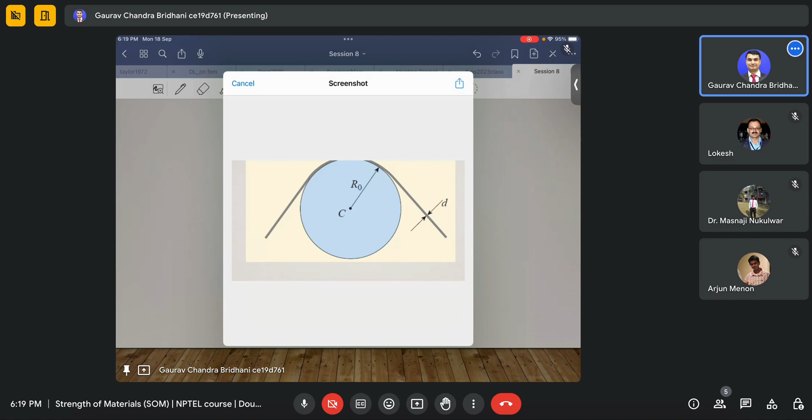We have to see how the bending is happening here and how we can relate it with the way we have studied in the lecture. If you see, this wire is going over this drum, and this drum is causing it to have a curvature. The surface of the drum, which is here at a distance r0 from the center, is kind of causing it to have a curvature. Obviously there will be some force in this wire, because you know what causes bending.

Pure bending is when there is no shear force, where the bending moment is constant over the length. In case of pure bending, you have seen in the lecture that shear stresses are absent - gamma xy, gamma xz are zero. And we have seen that sigma y, sigma z, or sigma yy, sigma zz are also absent. So only sigma x is there, that means there is an axial force. In a similar sense, if there will be an axial force in this wire, that will cause this part to bend.

So you have to think through yourself how it is bending. Obviously there is an axial force which will cause this wire to go around the surface of the drum, and hence this portion will be under bending.

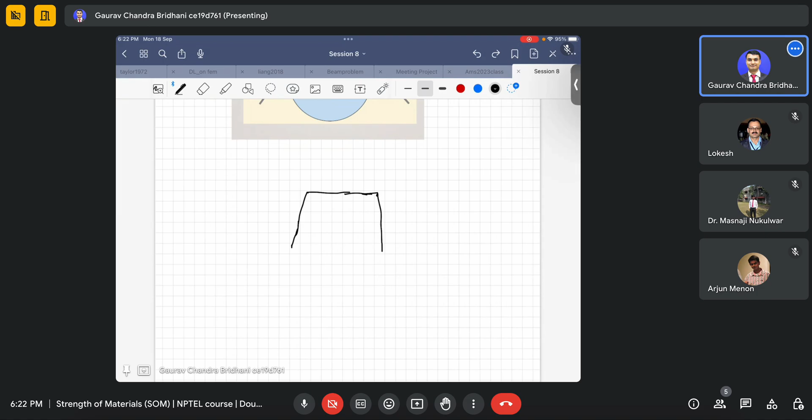As you know, the radius of curvature, as seen in the lecture, is till the neutral axis. Let me draw the reference case. You might remember the professor took some section like this in the lecture. This was the neutral axis, and he gave something like this. This was phi, and the radius of curvature was measured till the neutral axis, measured as rho till the neutral axis. The neutral axis is the axis with no stress - there is no stretch, no strain on this axis. This axis doesn't extend or compress, it remains the same length. So the definition of radius of curvature is till to the neutral axis.

So the same way we have to follow in our example also. That means here also, from this center, the radius of curvature will be till the center of this wire. And you know it's a wire, so it will be circular in cross section - also given in the problem, it's a circular cross section wire. So from this we can directly write the expression for the radius of curvature. This will be our radius of curvature: r naught plus d by 2, half of the diameter being the radius. So this will be the radius of curvature.

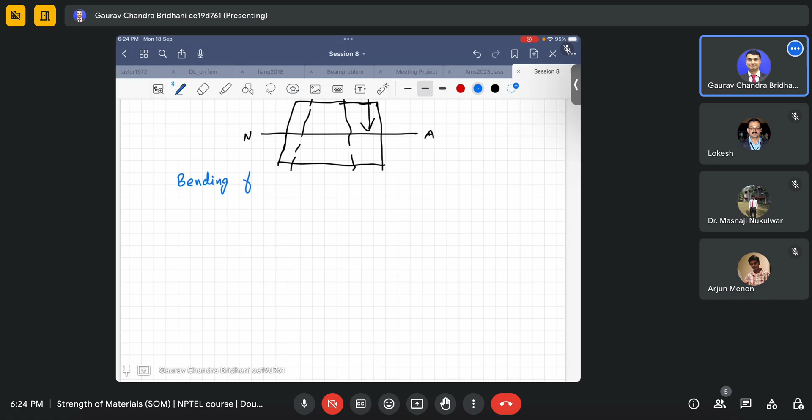So now we have utilized whatever has been given to us. Now let's proceed and see what we can do using the bending formula, or the Euler-Bernoulli beam theory, from which we derived the formula. So what we know is the bending formula: Mb by Iz is equals to minus sigma x upon y, is equals to E by rho. Okay, so this has been the formula.

And the minus sign is there because, as you understand, the positive sign is taken upward. So for a positive bending moment, there will be compression in the layer above and tension below the neutral axis. To ensure only that, the negative sign is used, because if you take positive y, it will remain negative, showing compressive stress. If you go down, y will be negative and the sign will vanish, becoming tensile stress. So this is the bending formula.

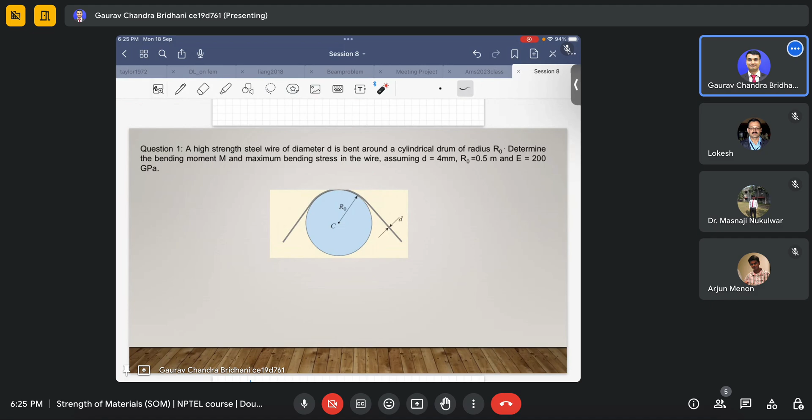Now we have been asked two things in the question, so let's check what we have been asked. We need to determine the bending moment M and the maximum bending stress. So what we need to find: bending moment, that is our Mb that we have to find, and second is maximum bending stress, that is sigma max.

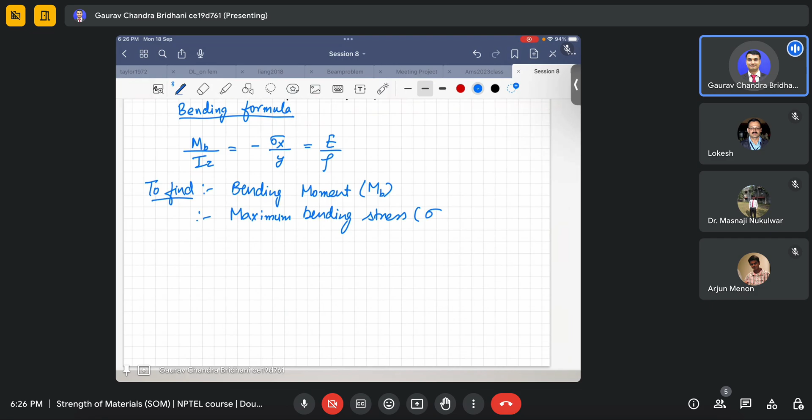So if you see, if you want to find the bending moment, what has been given in the formula - we know this part. What has not been given is Mb, which we want to find, and we need to know what is Iz. So we should find Mb, and we can find Iz, that's not an issue. So I will write these two first: Mb by Iz is equals to E by rho. Now first let's find Iz - the Iz of the portion which is bending. Here the wire is bending, so we have to find the Iz of the wire.

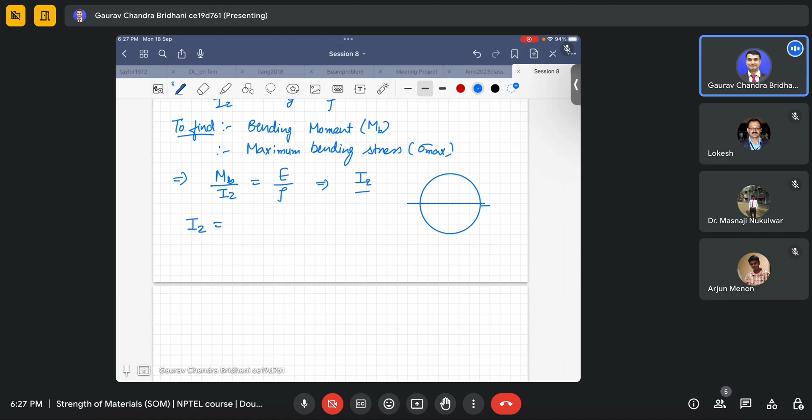Okay, so the wire has a circular cross section like this. We have to find the moment of inertia about this axis. So what will be the Iz about this axis? Iz will be pi by 64 times d to the power 4. Correct, that will be the Iz.

So now we know Iz in the above formula. Let's put it there and solve for it. So our M will be E times Iz by rho. E is given to us as 2 into 10 power 5 MPa, and Iz is given by pi by 64 into d to power 4. So what is d for us here? It is the diameter of the wire, that is given as 4, so 4 to the power 4, divided by rho. So we have just found rho, so rho is here.

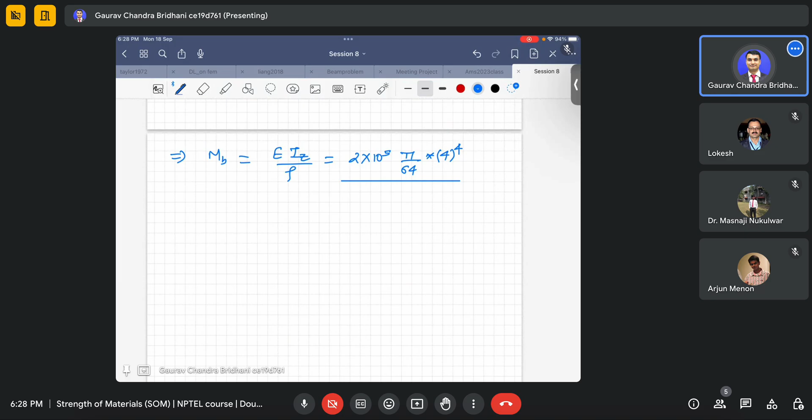r naught plus d by 2. So what I will do is put everything in mm. r naught is 0.5 meter, so 500 mm, and plus d by 2, so it will be 502 mm. I request any one of you to just find what value it gives to us.

Yeah, pi by 64 d to the power 4.

It is different. So suppose this is the z axis, and this is the y axis. So what we do is, that is the x axis, the polar axis. The axis in the longitudinal direction, that is the polar axis.

So you know that I x-axis is what? I y plus I z. And if you have I y, and you know I y and I z are the same, because it's a symmetrical shape, a circle. So if you add these two, it will become pi by 32 d to the power 4. That is the I x-axis, and I x-axis is called the polar moment of inertia.

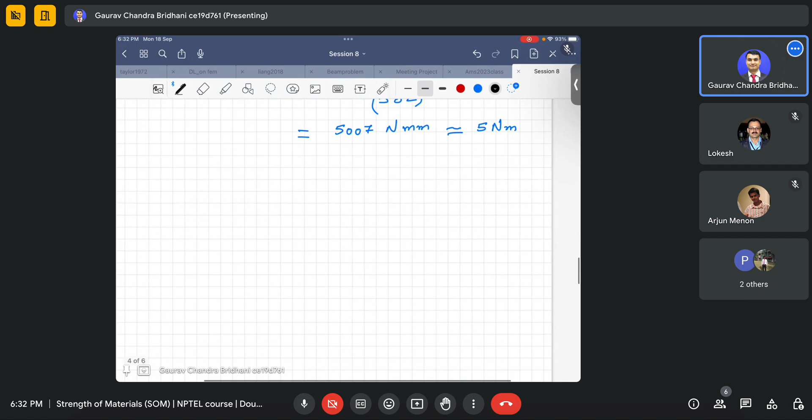Suppose it is something like this. I am trying to draw as correctly as possible. Consider that the thickness is not changing. Here it looks changed, but assume it is the same, it is same actually. So I am saying that suppose from this end to this end it is in curvature, in contact with the cylindrical drum, and this part only is being in pure bending.

So what I told is that there will be a neutral axis. Let's draw the neutral axis. Suppose this is the neutral axis. And as you know, here the material is isotropic, it is given. If nothing is being specified, we can easily assume that it is isotropic, and also E is given as 2 into 10 power 5 MPa, so we can go with that assumption.

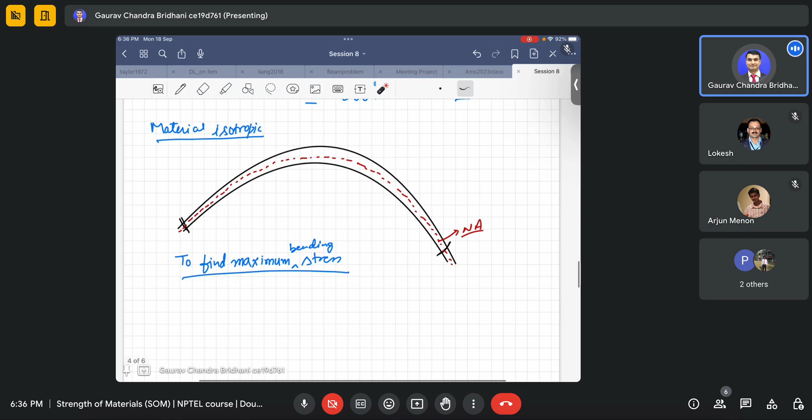So we need to find the maximum. Obviously the maximum will be at this surface only. We need to find the maximum stress. So our objective is to find maximum stress, maximum normal stress or bending stress — basically we call it maximum bending stress, because this stress is developed due to bending. We need to find it on either this or this surface. We are more interested in the maximum. So using the same bending formula, I'll get the maximum value, using these two terms to find the value of maximum stress. Let's find that.

We know that I'll drop the sign now. Why am I dropping the sign? Because now I am interested in the maximum, and maximum is the magnitude, not the sign — whether it is compressive or tensile. My objective right now is the value, so I'll drop the sign and say sigma max by y, which will be equal to E by rho.

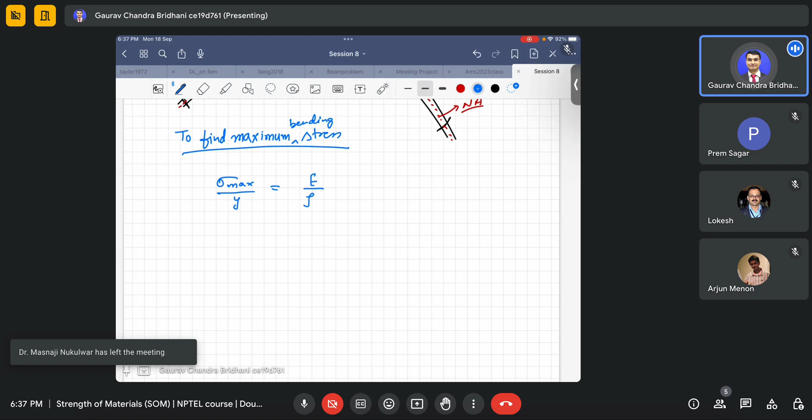So let's find sigma max, and I told you where the maximum will occur. Maximum bending stress will occur at the surface of the wire. You can choose either the tensile surface or the compressive surface. So sigma max will be: E is 2 into 10 to the power 5, and y will become d by 2. So it will be d by 2, d is 4, so it's 2 divided by rho. So rho is 500 plus 2. So sigma max will be 2 into 10 to the power 5 into 2 divided by 502.

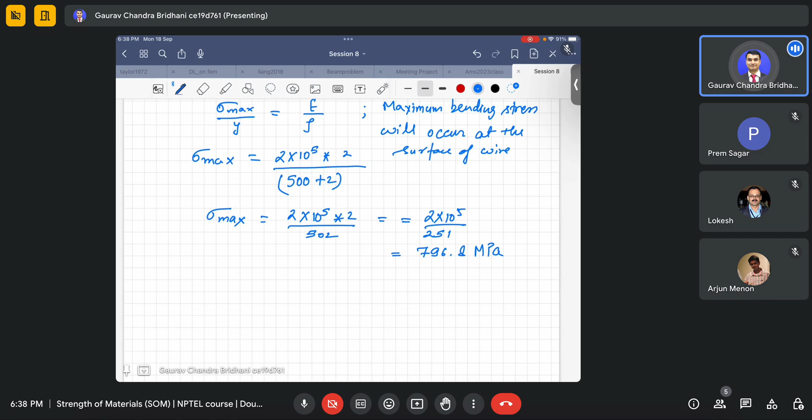So if you solve this, what will you get? It will be 2 into 10 to the power 5 by 251, I think. Can you divide this and find the final answer? It will be 796.8 MPa, so I'll say 797 MPa. So that will be the maximum stress, 797 or 796.8.

And it will occur on the surface of the wire, and this is due to bending. So this is the stress generated due to bending. That's how we can study a problem like this. So this is very common — like if you ask me what is the situation where these kinds of things happen.

Why is this distance, y? I'll explain. It is the distance from the neutral axis to the surface where we are finding the stress, basically bending stress. It depends on us. Our objective was to find the maximum value, so we took y equals d by 2 because we want to find it at the surface.

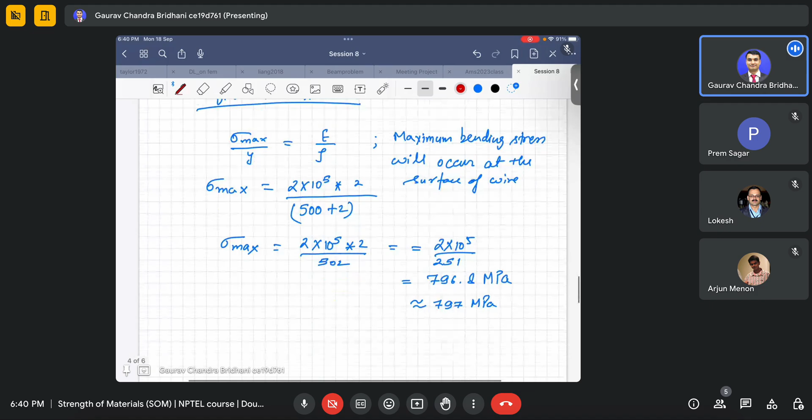Yeah, come again. Yes, Arjun. Yeah. Yes, it will pass through. It is the longitudinal axis also. Yeah.

Okay, what I'll do is draw the wire longitudinally as well as in cross section.

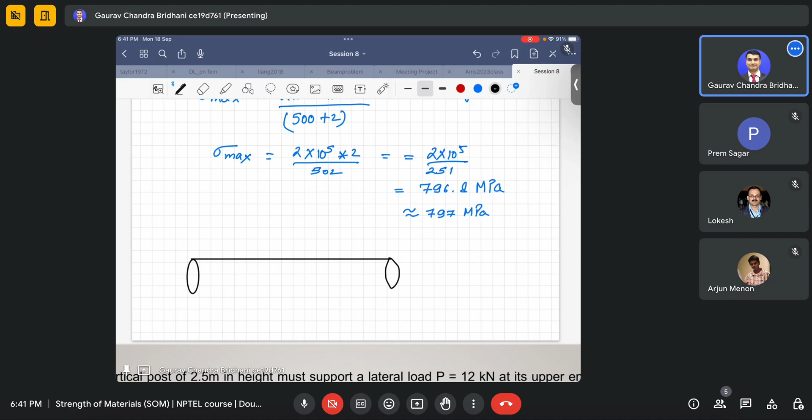Suppose this is your wire and this is your longitudinal axis, and I'm drawing here the cross section. Okay, so it also passes through here. So basically this is your neutral axis, which will pass through the center of the circle.

And what we are doing, we are trying to find this is our y, because we are trying to find at this point, at this top point here, the stress, because the stress will be 0 along this axis, there will be no stress.

Yeah, Lokesh. If you take downward, it will be negative, and accordingly the thing will change, and the magnitude will be same. Only one time it will be tensile, one time it will be compressive. That's all, we can take it negative.

So this is our y, this distance from the centroid to this point, red point marked, this is the y, because as we discussed, either the stress will be maximum here or there only. So anyway, any point we can choose, because our objective is now to see what is the maximum value.

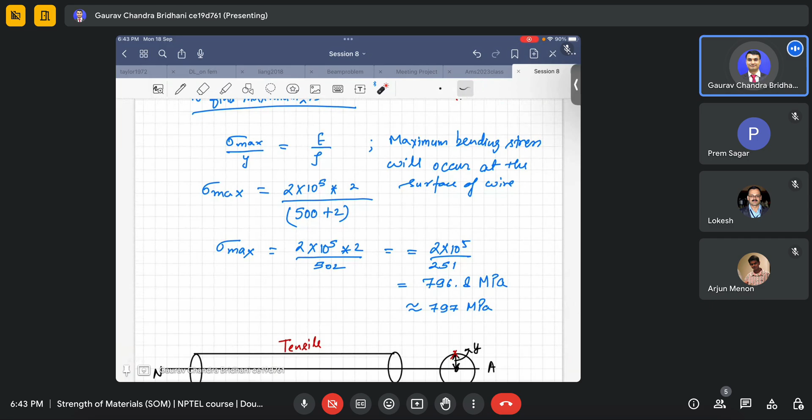Okay, so this is how we'll find what is the sigma max, and we already know that at one surface sigma max will be tensile and at another surface it will be compressive, and you can see that the values are very high. If you compare with what we studied in mild steel, it was around 250 MPa was the yield, but here it is very high.

So actually it's because it's a high strength steel wire. Basically high strength steel wires have a very high yield stress, so their yield value will range between 1100 or 1200 to around 1500 or even 1600. And these are not single wire, there are strands of wire. So basically those wires which are used in pre-tensioning and post-tensioning, those are one of the examples of the high strength steel wires which I can quote.

So what I was saying, where we can find the applications, like what kind of situation we will see in real structures. The best I could say, like above the pulley. So this could be the pulley and the wire going above it.

Because what we know, the steel wire which we use over the pulley is also subjected to uniaxial loading. It will be uniaxial till here, but as soon as it enters this, it is kind of bending because of this pulley. One way this, but we have to put a proper idealization there about the shear, whether there is friction between the pulley and the wire or not, because if friction is there, that will cause some shear. So that is one example.

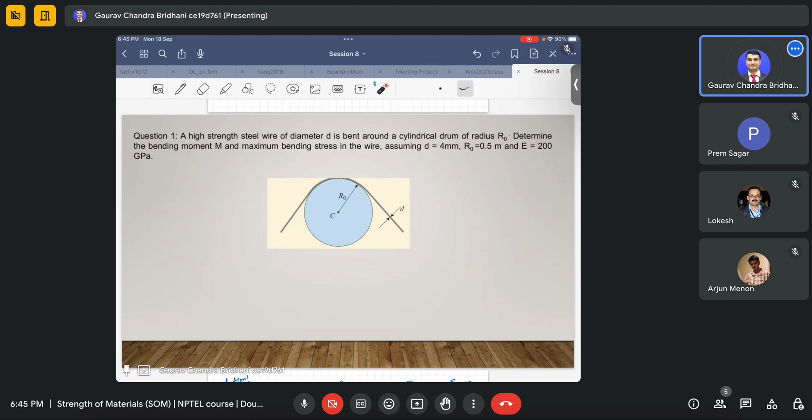Then on these bridges we use wires. Bridges also can have these kind of structures which will pass over the wire from one side to the other side. So there, the best example we can see is of pulley.

So in this problem we came to know how we can analyze or find the moment, bending moment, as well as the value of maximum stresses if we know the dimensions already.

As in this problem we knew the dimensions, so we were able to find the other values. Okay, I hope you understood this part. So we'll move to the next problem.

Okay, yeah, yeah, yeah, yeah, yeah, yeah.

Yeah, for a linear constitutive relation, if your material model is what we are using here, Hooke's law, then for Hooke's law it will be like that. But if the constitutive relation changes, if you bring in some different material, some orthotropic or anisotropic material, then the variation of the stress may not be linear.

Although the strain variation will remain linear. As you may remember, the professor told you that the variation of the strain, epsilon x, was minus y by rho, or minus y into d phi by ds. So that variation they got irrespective of the material. There is no involvement of material there.

So what we learn from that, the variation of the strain will always be linear in homogeneous beams, or homogeneous isotropic beams. But when you have a constitutive relation which may be non-linear, meaning the stress and strain are not related in a linear fashion, then the variation of the stress could not be linear. It could be non-linear also, it could vary as y square or something like that.

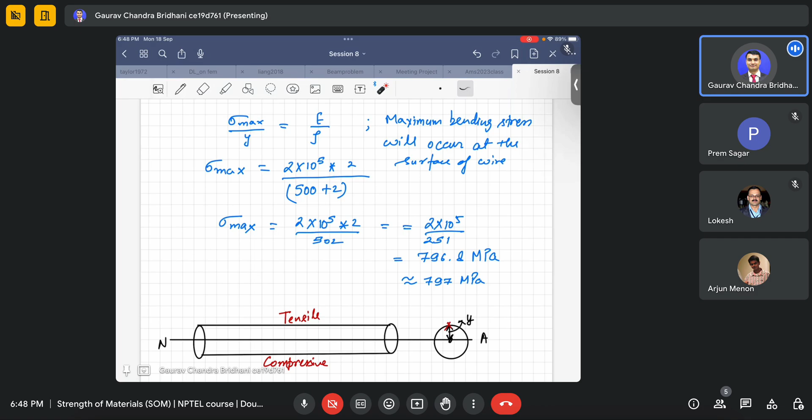So what happens if you have shear stress also involved? Let's take up an example of that. Then we'll move to the next problem.

So let's say we have some situation like this. We have a beam, something like this. We have a roller here, a hinge here, a roller here, and a point load P, and this length has L. So what I'll do is draw the bending moment diagram and shear force diagram of this beam.

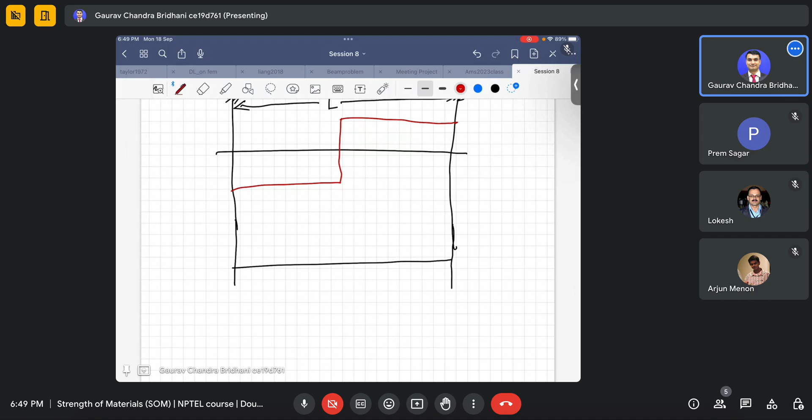So let's do that. First I draw the shear force diagram. It will be something like this, vertical here, and then it will be like this. And if I draw the bending moment diagram, it will be something like this. This will be PL by 2, and it will be minus PL, minus P by 2 here, P by 2 there. So this will be our shear force diagram, this will be our BMD.

Now you see that there is a variation. The bending moment is varying along the length. From this portion to this portion it is varying, it is not constant. You can see there is a positive shear here, a negative shear here.

If you remember the lecture, dm by dx comes as minus v. This was done in the last lecture. That means whenever there will be a variation of m, the bending moment, there will always be a shear force associated. That means as soon as you come up with a case where there is a variation of bending moment, invariably you will come up with a shear force also.

Now the bending theory, the formula we have just used, is developed only for pure bending, and it will give an exact answer only when the body is isotropic and it is subjected to pure bending and it is a slender beam. Those are the very basic foundational assumption requirements: the beam should be slender, meaning the depth of the beam should be far less than the length of the beam; second, it should be isotropic material; and third, it should be subjected only to pure bending.

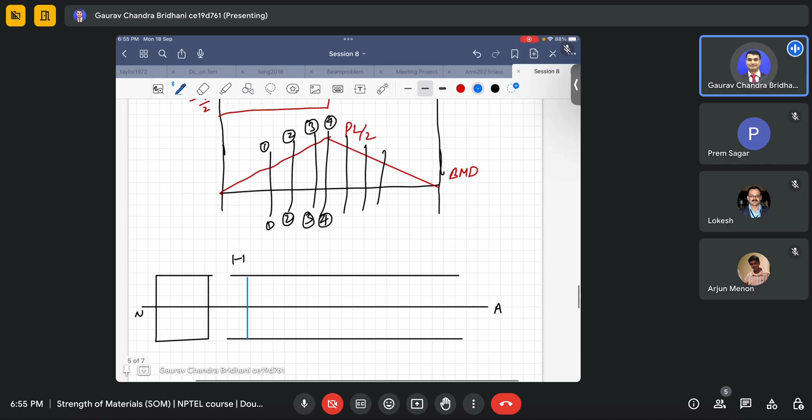Now I will draw the variation. First is 1-1. So for 1-1, as you know, what will be the bending moment? The bending moment of 1-1 will be less compared to 4-4. So we know the equation: M/Iz equals minus sigma x by y, that we know.

I am drawing the variation along the depth. So what I will do is write sigma x equals minus M into y by Iz. Now M I will write for this section specifically, so I will write the formula also. So for the first section it will be sigma x equals minus m1.

I will write m1, so it becomes m1 into y by iz. Now m1 is constant, iz is constant, only y varies. So y will vary from 0 to some positive value. I'll mark this as plus h here and minus h here, and it is subjected to positive bending.

It is subjected to positive bending, meaning the bottom portion will experience tension and the top portion will experience compression. So I will draw the variation - it will look somewhat like this, with this in compression and this in tension.

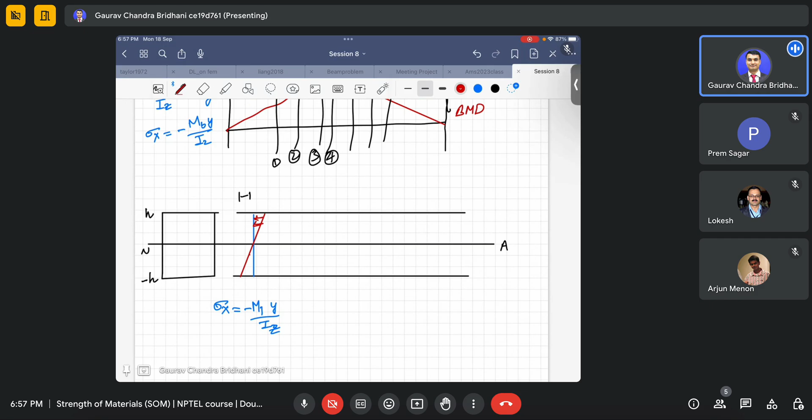Now I'll go to section 2. What will be the variation for section 2? Again a straight line. Now for section 2 I will write the equation again: sigma x equals minus m2 y by iz. The only thing that has changed is m2, rest is the same.

You know that m2 is greater than m1, and it is not changing within section 2 - this will be the value of m2, the bending moment at section 2, and that is greater than m1. That means sigma at x2 will be greater than sigma at x1, for the whole variation, although it will be 0 at the neutral axis, rest it will be more.

So how do I have to draw it? I have to draw a bigger variation, taking a bigger point, something like this - it will be more. You can see sigma x2 is more than sigma x1 at the corresponding levels of y.

Now let's go for section 3-3. I'll draw a vertical line for section 3, and what will be the formula? Sigma x3 equals minus m3 y by iz. Again, what has changed is m3, rest all are the same. That means sigma x3 will be more than sigma x2.

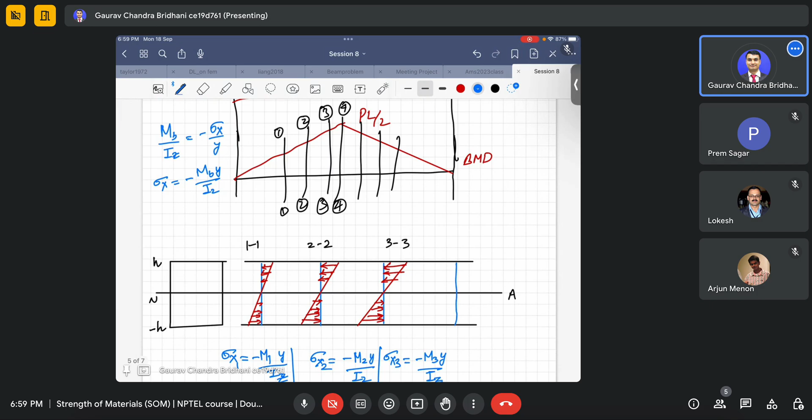Let's go for the final section, where we have the maximum bending moment. As you can see from the figure, section 4-4 has the maximum bending moment. So we will draw for that point, section 4-4. What will be the value here? Sigma x4 equals minus m4 y by Iz, and we know that m4 is the maximum of all.

So nothing is more than the moment at that point, so I'll draw the maximum one - something like this will be the maximum, with compression here and tension here.

So that's how, from section to section, you can visualize how the bending stresses change. Now if somebody asks where the maximum bending stress will occur, from this figure we can always say that we have to first check if the bending moment is constant. If the bending moment is constant, all these top values will be the same - they won't vary. That is the whole point.

But if the bending moment itself is varying, like we can see here, the section where we find the maximum value of the bending moment - that point will be the place where the maximum bending stress occurs, and that too on the top fiber. Either you work with the top fiber or the bottom fiber, but that only - either this place or this place on the section with maximum bending moment, that is the point. But the variation of stress will not be nonlinear in this case either, because we have said the material is isotropic and we are using Hooke's law.

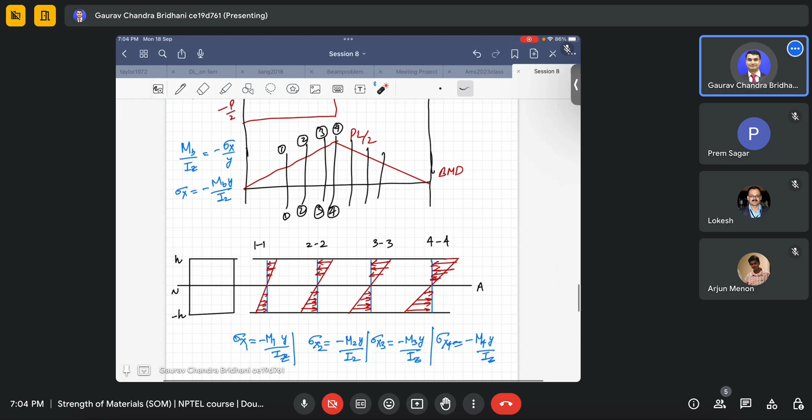I'm pretty sure the professor will explain this with an example, I think for deflection, because that is the most important part there. So from there he will explain how we are still using the bending theory, although there is a shear force.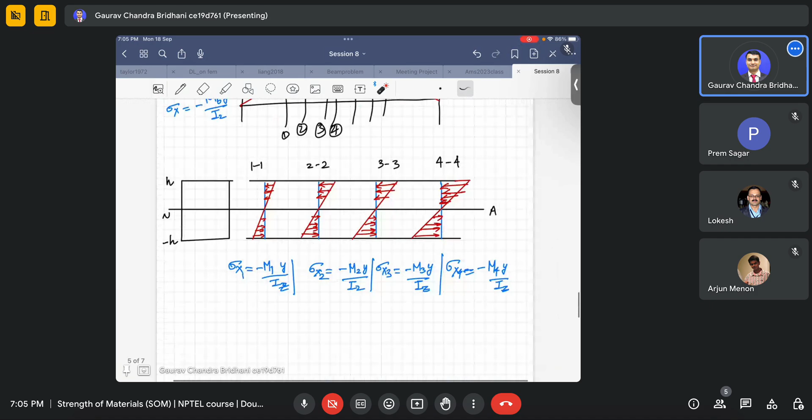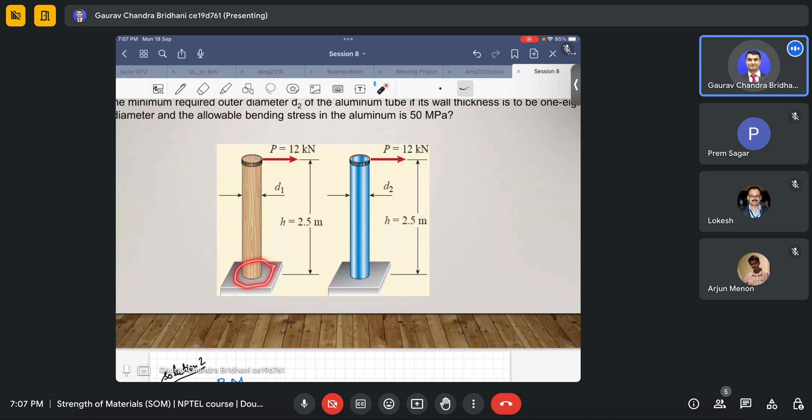So, our load is such that it acts as a cantilever. This is the fixed end, this is the free end, and there is a load acting at the free end. If I draw the bending moment diagram, it will be linearly varying, something like this. It will be 0 here, and it will have a maximum value at the base. This will be P into that H distance, where P is the load and H is the distance.

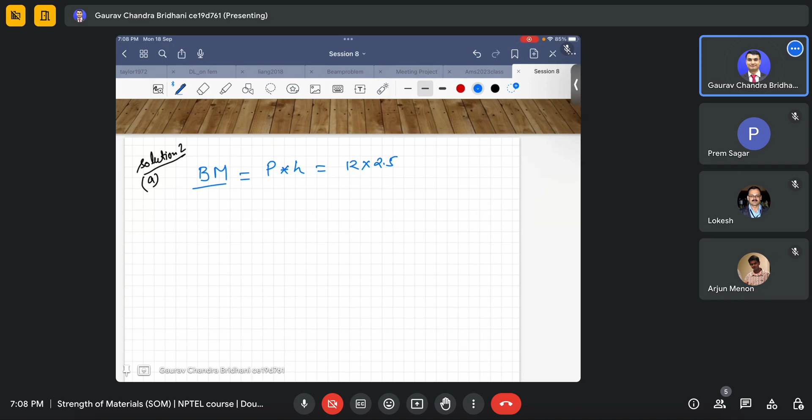So I will directly write what is the bending moment. P is given as 12, so P into H will be the bending moment. P is 12 and H is 2.5, so it will be in kilonewton meter. I think this will come to 30 kilonewton meter.

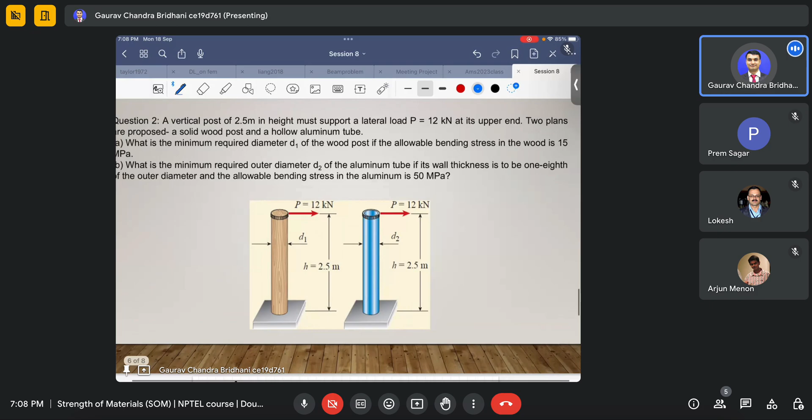So we got the bending moment for the wooden case. We are solving the first wooden case. Now let's write down what is the allowable bending stress. Sigma allowable for the wooden case is 15 MPa. That is the allowable stress.

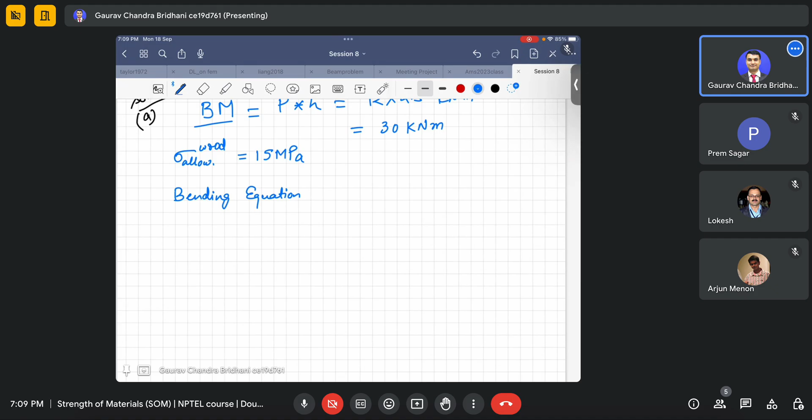Now let's go to the bending formula, our bending equation. What we know is M by IZ is equals to minus sigma x upon y, is equals to E by rho. That will be our equation.

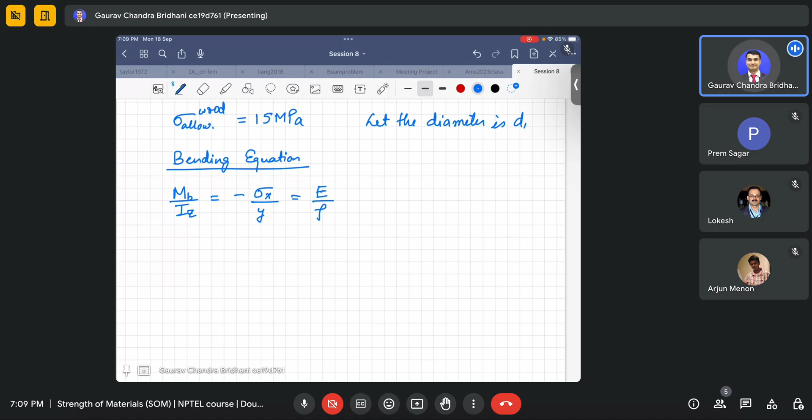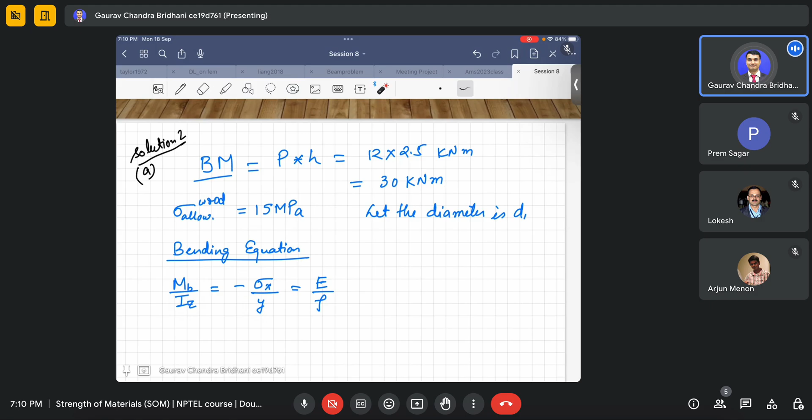Now we want to find the diameter, given as d1 in this case. Let the diameter be d1, which is already given. Now we know what is the bending moment, and we know the allowable bending stress value. What we don't know is what diameter we should design for, so that it will have this allowable value and also be able to resist this given moment. So basically we have to design the diameter.

So what I will do is draw the cross section of the post. This will be the ZZ axis, and this will be the center. As we have discussed, the maximum will occur at this topmost point.

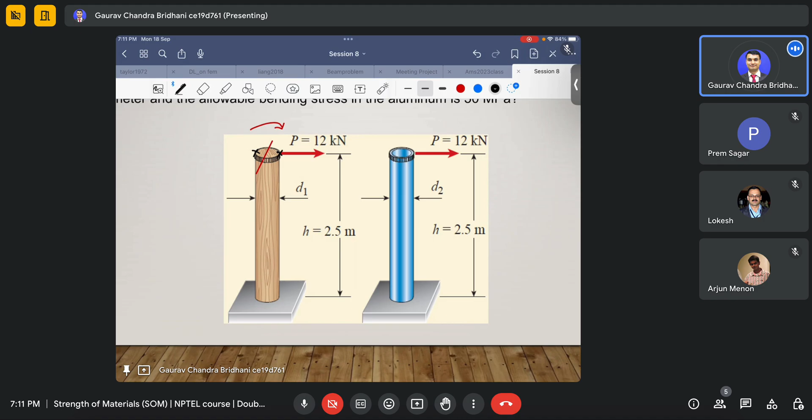If it is bending, as marked in the figure, some bending moment will be acting like this. So if we see, the axis of bending, it will bend around this axis. Either the maximum will be here or here, but one place it will be tension, another place compression. As per that case, I have rotated the cross section here, don't get confused - either it will be there or here. I've just rotated that cross section for ease of looking, and the moment is acting like that only. There also I have shown how the moment is acting - you can see the moment is acting.

This is our ZZ axis. Suppose the moment is acting like this, so I will represent the same moment here - it will be like this. This is the moment acting.

For this case, we know how to find IZ. IZ is Pi by 64, and d1 is the diameter, so d1 to the power 4. And what will be y? Y will be d1 by 2, it will be half - that is the radius where we are going to find the maximum value. So what I will do is insert these values here.

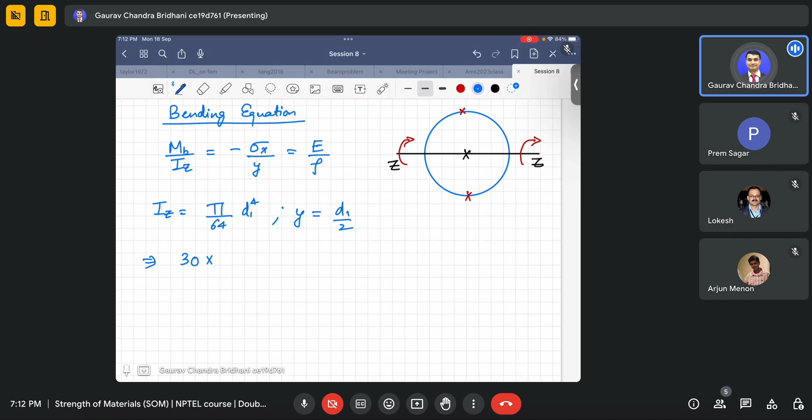So our moment is 30 kilonewton meter. I'll convert everything into meter, Newton and mm, so it will be 10 to the power 6 - it will get converted into Newton mm.

So the bending moment in kilonewton meter divided by IZ, that is pi by 64 into d1 to the power 4, will be equal to... I will drop the sign because I am going for the maximum value, so no need of sign here. It will be 15, the maximum allowable value given to us, in MPa. So MPa is also Newton per square mm, divided by d1 by 2. So from here we can get it directly that 30 into 10 to the power 6 divided by 15 is pi by 32 d1 cube.

So d1 cube equals, or I will write d1 equals 2 into 10 to the power 6 into 32 by pi, cube root. So if someone can help me find this value, 2 into 10 power 6 into 32 by pi, cube root of that. So what will it give?

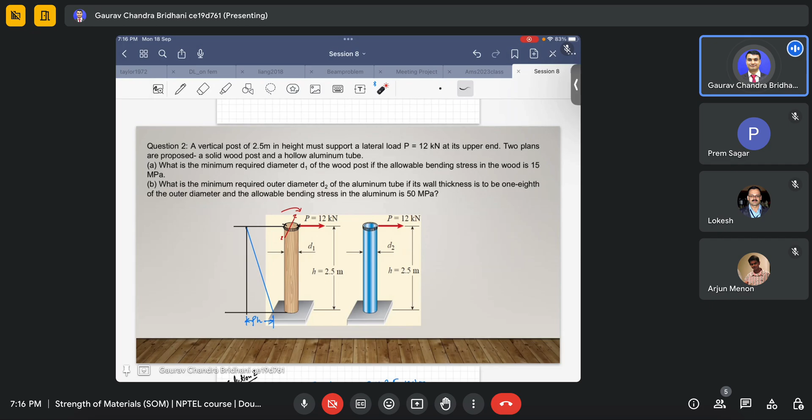Then we'll go for the next part. Now the next part is more interesting, in that case first of all it is an aluminum post instead of wooden. We have changed to aluminum. So what is the minimum required outer diameter? We need to find this D2 of the aluminum tube if its wall thickness is to be 1/8 of the outer diameter, so thickness T of the wall is 1/8 of D2. And the allowable bending stress in aluminum is 50 MPa. So let's do that.

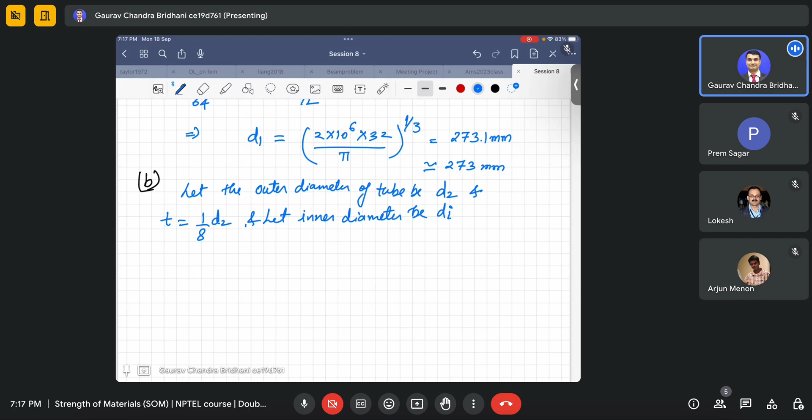So we'll say let the outer diameter, diameter of tube, be D2. We know thickness is 1/8 of D2, that is given. Let inner diameter be Di, meaning D inner diameter. So I will draw the cross section, something like this and something like this. So this is the neutral axis.

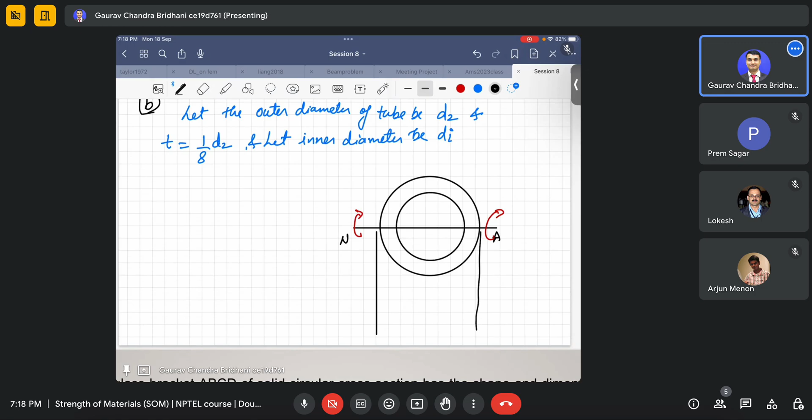About this the bending is acting, same bending moment is acting, no change in bending moment. Only the material and the dimensions are changed. And you know which diameter this is. So this one is the outer diameter d2, and this one is the inner diameter di.

Now we know the thickness is 1 by 8th of d2. So if I find di, what will be di? Di will be d2 minus 2 times thickness, correct? So what is d2? D2 is d2, and this is 2 into d2 by 8. That means di is d2 minus d2 by 4. That means di is nothing but 3 by 4 of d2. That means we got di in terms of d2.

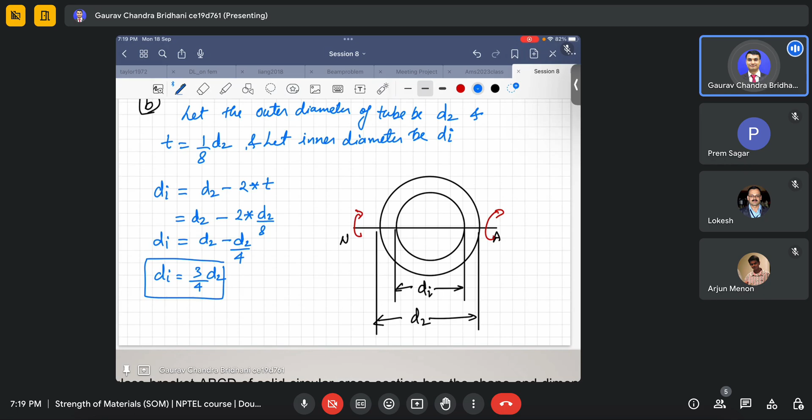Now from this, what we know, again we will go for the bending formula. I didn't calculate the bending moment again here because bending moment is same, it is not going to change. So the formula is Mb by Iz equals minus sigma x by y equals E by rho. Again we have been given a bending moment of 30 kilonewton meter.

Iz we don't know because the diameter is unknown. Sigma we know, the allowable value is 50 MPa, and y we will find. So sigma allowable for aluminium is 50 MPa, that is the allowable bending stress.

Now as you can see from this figure, this will be the center. I will draw the radius. You know there is no material inside, nothing is there, so there will be no stress there. Stress will start varying from here and vary till there, and because this point is farthest, this will have the maximum. Don't confuse yourself, the y is increasing in this direction, so this will be the maximum.

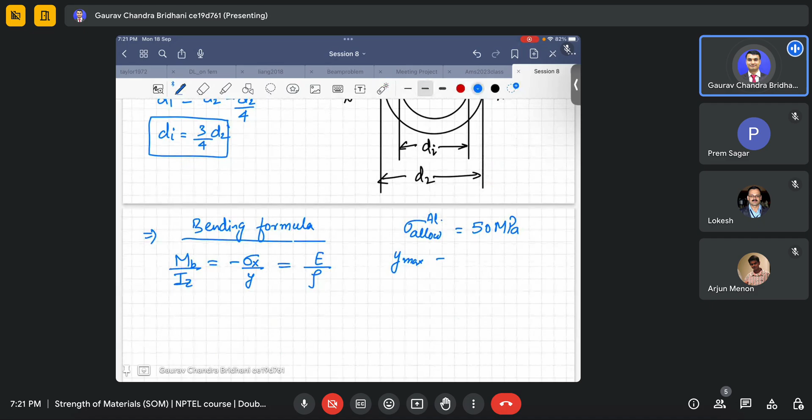And how to calculate Iz? It will be calculated the same way we calculated the polar moment of inertia for a hollow section, just using 64 instead of 32. So it will be pi by 64 times d2 to the power 4 minus d inner to the power 4.

Now we know what d inner is in terms of d2, d inner is 3 by 4 of d2. So it will be pi by 64 times d to the power 4 minus 3 by 4 d to the power 4. I'll take d to the power 4 outside as common, giving pi by 64 times d to the power 4 times one minus 3 by 4 to the power 4.

So can someone tell me this value, this factor one minus 3 by 4 to the power 4? It comes out to 0.6836, times pi by 64 times d to the power 4. So this is our Iz that we have to use.

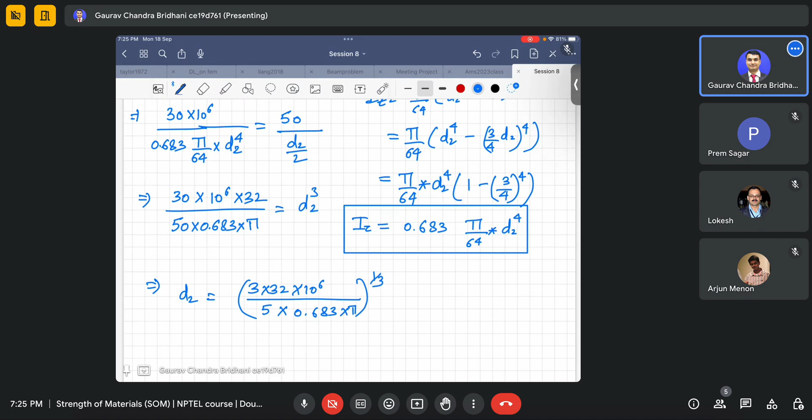So if someone is able to find this, please let me know what is the value of d2. Okay, 207 point something. So d2 is coming out to 207.6 mm, so we can safely say 208 mm.

So we found d2, the outer diameter, and we can find inner di, which is 3 by 4 of d2. Just multiply this with 0.75 and tell me the answer. 208 multiplied by 0.75 gives 156 mm, so that will be di, the inner diameter.

So we were able to find that the inner diameter is 156 and outer diameter is 208 for the aluminum case, where we have an allowable stress of 50 MPa, subjected to the same bending moment of 30 kilonewton meter, with the length of the beam also the same.

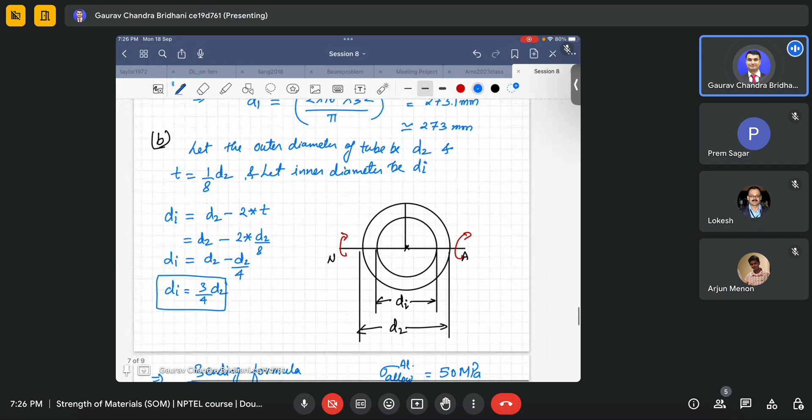That is how we choose what material to use to make a beam, because we have to see by which material, utilizing minimum material, we can get the maximum output. We have to optimize the weight also.

Right now we are not talking about weight, but when we come to a real design situation, suppose we have to design a shaft which is subjected to bending, or suppose we have to design some beam which is subjected to bending somewhere, in that scenario weight also plays a very important role. As we go for a heavier material, or a material having higher density, or longer beams, the self weight of the beam will also increase.

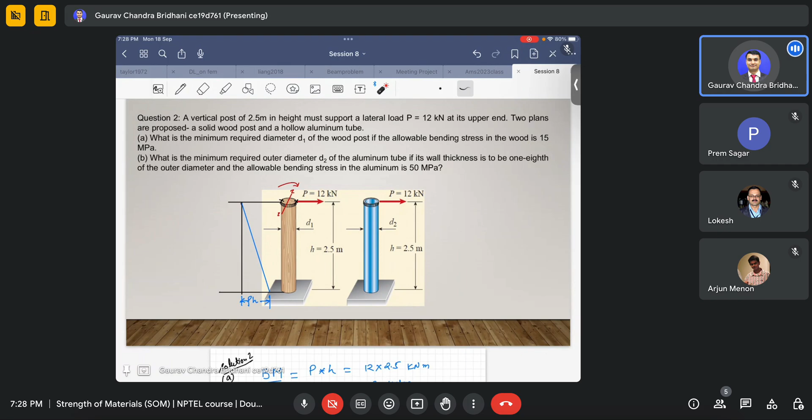So for that we have to think of the best material, so that we can get maximum strength with minimum weight. That's how steel plays a very important role, because it has a very high value of strength to weight ratio. It has very good strength compared to its weight.

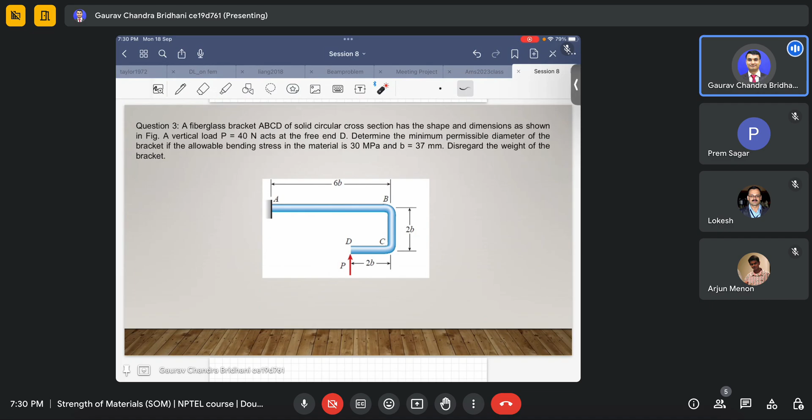Now determine the minimum permissible diameter of the bracket, if the allowable bending stress in the material is 30 MPa, and b is given as 37 mm. Disregard the weight of the bracket — we are not concerned with the weight or the moment generated from the weight of the bracket. We are only worrying about this load of 40 Newton, and how much diameter we should make so that the allowable bending stress in the material does not exceed 30 MPa.

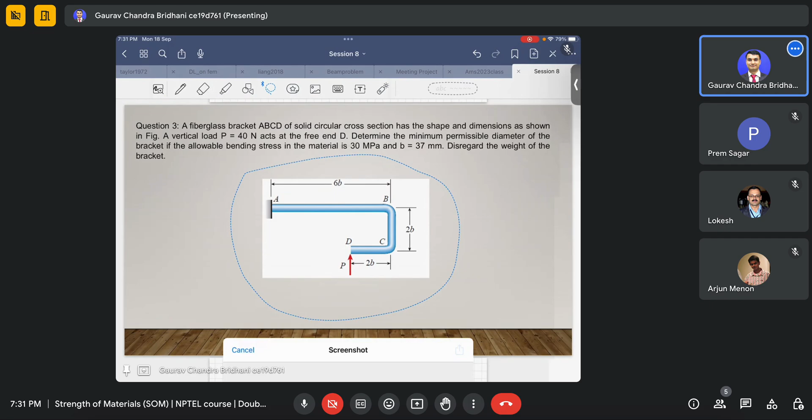So what I'll do is copy this figure, and then we can see how we have to solve this one. Okay, so this is for us.

Okay, so first of all, in this problem, where you can't really find what is happening or where the bending moment is coming from, in this kind of figure we have to draw the free body diagram. We have to use some concepts of mechanics and come up with a free body diagram. Then only we can understand what is happening.

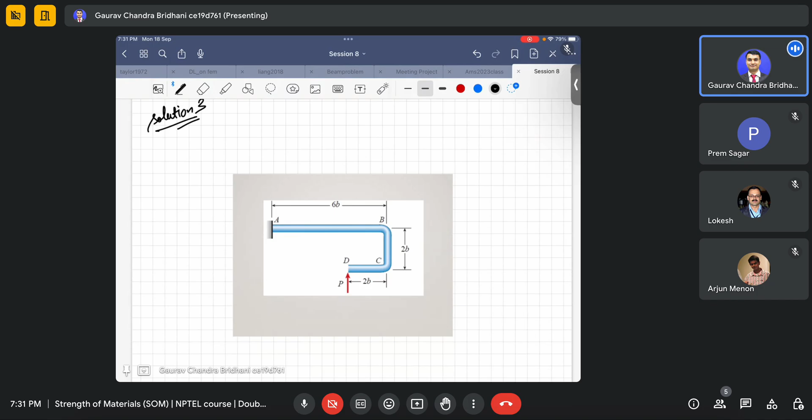So what I will do is draw the free body diagram for each of these parts: AB, BC, and CD. I have the luxury to start from anywhere, it's not fixed that I have to start from A or B. But the most important part is that the body should remain in equilibrium, it should not go out of equilibrium.

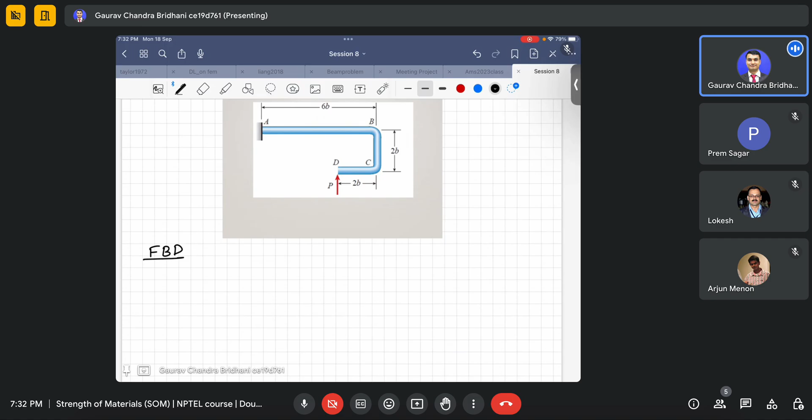So what I will do is start with DC, because the force is already given there, the load is given there. So I will draw first for DC. FBD, free body diagram, we will draw for DC. I will draw the DC part here.

Don't get confused that it is a rectangular cross section, it is circular only. I am just not drawing it in that sense, or I can draw like this, but remember that it's circular, not rectangular. This is end D, this is end C, and I am drawing it.

You know this, I have explained this. When we draw a free body diagram, we draw a very small distance away from the joint, from that place where it is joined, to reveal the reaction forces. So this P is given here.

So first of all, if I have to translate this force, how will I do that? What I will do is draw one force here, P, like this. So what I have drawn is a similar force here P acting in the same vertical line, and another force P acting in the vertically downward direction. Now because I have added this, nothing has changed, since the same force acting upward and the same force acting downward has been added. But what happens is you can see there is a force showing like this, which is having a couple.

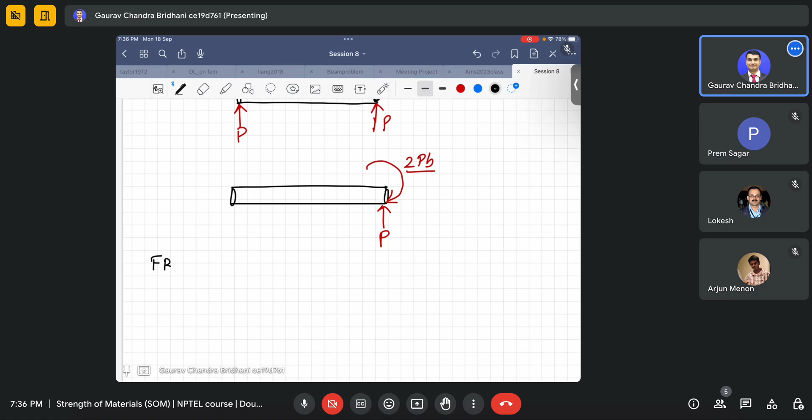Now, at this joint, the bending moment as well as the forces will just be translated to this vertical CB. So what I will do is draw the FBD for CB. Let's draw first the CB part. So it will be something like this.

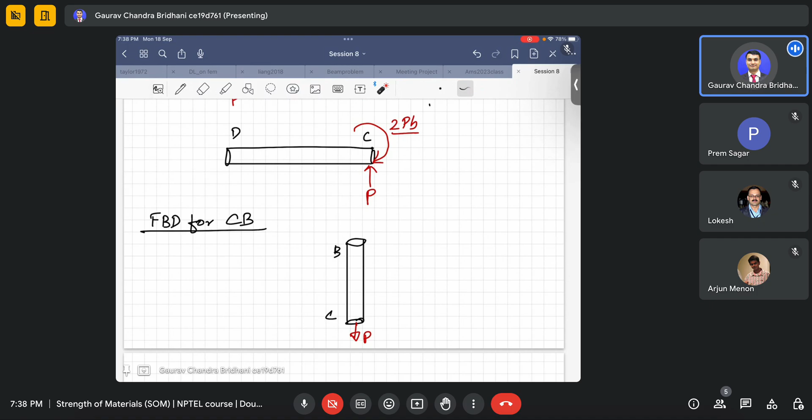Now similarly we have a moment. What is the moment? 2 into Pb, acting clockwise. So to have moment equilibrium at joint C, to counter this clockwise moment, there will be an anti-clockwise moment with the same magnitude, 2Pb, at C, in the opposite sense.

So now you know what is happening in CB at end C. To satisfy this, again we have to apply the equilibrium equations. We have three equilibrium equations. What I am doing all the way is applying equilibrium equations only, so again we apply them in this part.

When there is an axial force here, to counter this there should be an axial force here also, to counter that and to counter the moment which is there. So now I have satisfied equilibrium in this direction - force equilibrium along this is satisfied. There is no force in the horizontal direction, so nothing has to be done. Now coming to the moment.

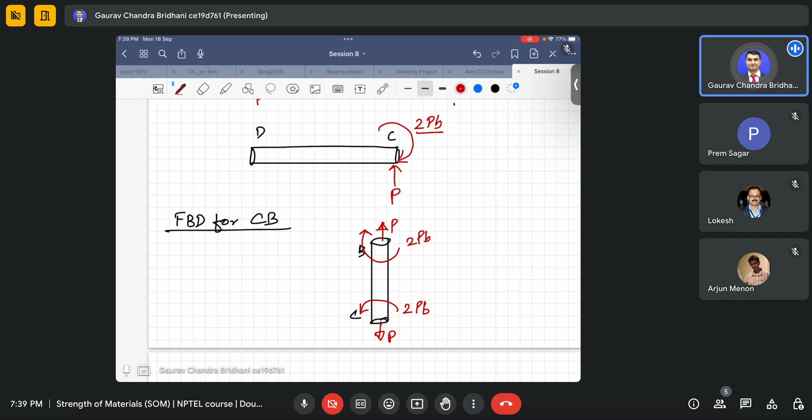There is a moment here which is anti-clockwise at this end. So to make this part BC in equilibrium also, I should have a clockwise moment like this to counter that moment. So I will get a clockwise moment here, 2Pb. So this is how we got the free body diagram for CB.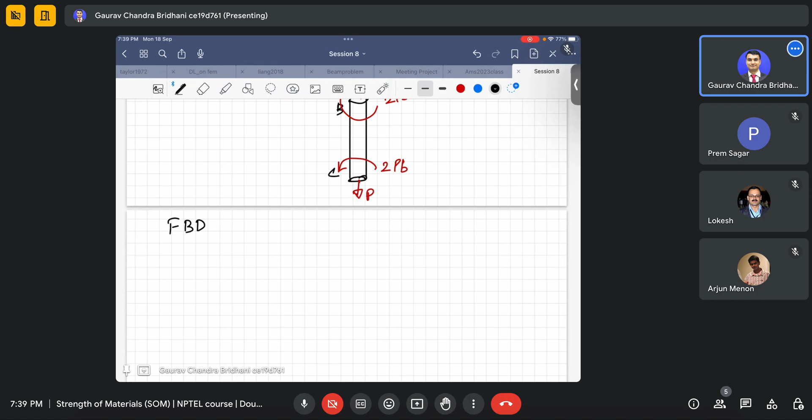Now we'll do the free body diagram for AB, the last part. You can see from the figure we have done with this, we have done with this. Now only the last part is there. Okay, AB, I'll draw the AB. This is A, this is B, and this length is 6B.

Now to have equilibrium at joint B, whatever forces are acting at joint B will be transmitted to the joint B of AB, similar but in the opposite sense. So this load is vertically upward P here, so it will come vertically downward, opposite sense. Okay, this moment is...

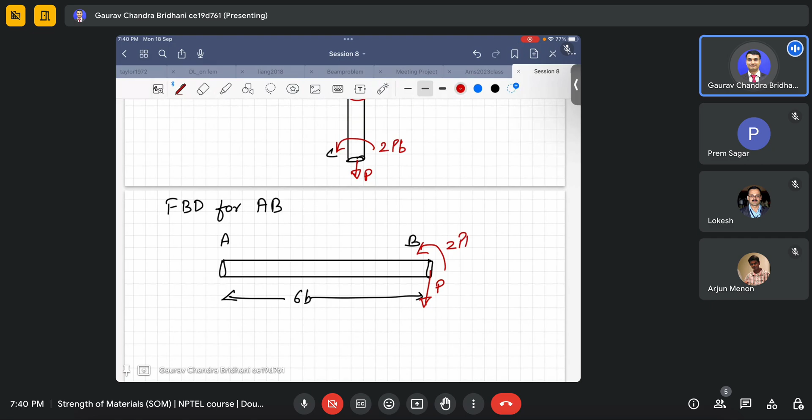This moment is 2PB, acting in a clockwise sense. So what will be the moment acting there at B? In AB it will be anti-clockwise, 2PB, to counter the one at the B end of BC. So now we got this.

Now we know that end A is fixed, you can see it is a fixed end. So now we can find the value at end A if we want. How will we find it? First we have to satisfy the force equilibrium. Is there any force in the horizontal direction? No force, so no force is required to equilibrate it.

Is there any force in the vertical direction? Yes, there is a force acting vertically downward here, so I need a force acting vertically upward there. So I'll draw this vertical force P. Now the AB part is in equilibrium - force equilibrium is satisfied in horizontal and vertical directions.

Now coming to the moment. What I do is come at this point A and find the total moment acting. You can see the total moment is due to this 2PB and the moment caused by this vertical force. So what will it be? I'll take any one as positive and negative, or go with the convention.

As I told you, on the left of the section, clockwise will be termed as positive bending moment, and on the left of the section if there is anti-clockwise it is termed as negative.

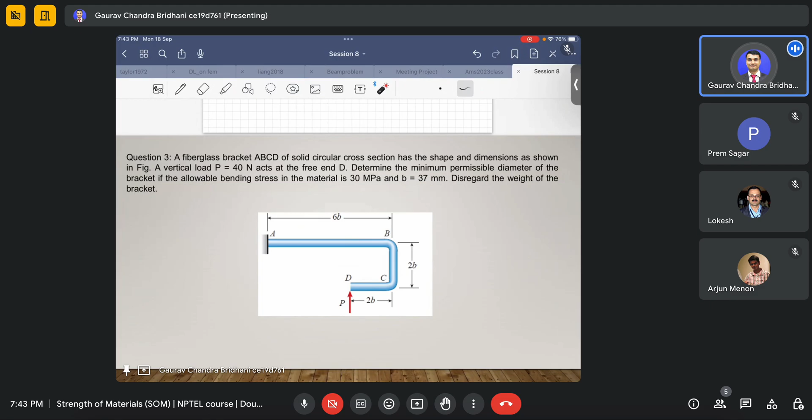Because the question asks us to determine the minimum permissible diameter of the bracket if the allowable bending stress in the material is 30 MPa, and B is given. So first we need to find where the maximum bending moment is coming, in which part it is coming.

You can see that in this part you are getting 2Pb, and this 2Pb is coming due to the cantilever action of DC. So I will say here, maximum bending moment in DC is 2Pb. That is the maximum magnitude, I am not worrying about the sign right now.

Now coming to the other part, CB. If you look at CB, this P load is just an axial load, but we are having this bending moment which is 2Pb. This is same throughout, it will remain the same, it won't change. Here there will be a variation of bending moment, so I will draw that also.

If I draw it, it will be like this. Here it will be maximum 2Pb. In this case it will remain constant, the bending moment remains constant, same 2Pb here also. So you can say this part is subjected to pure bending.

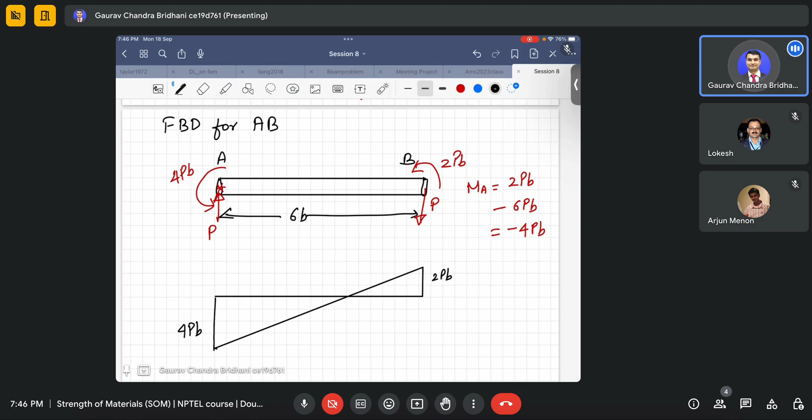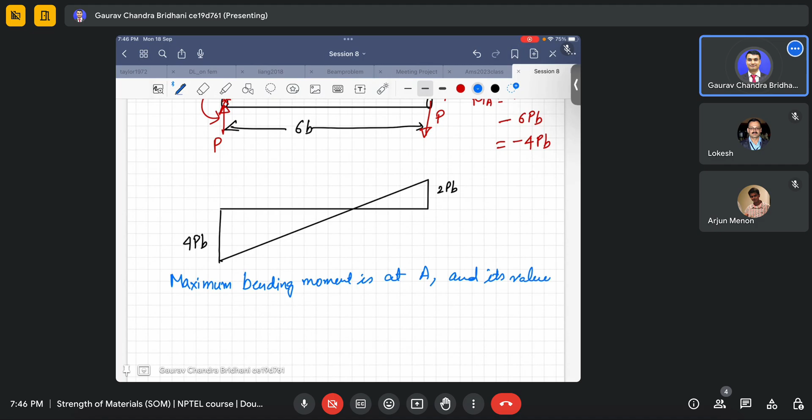From this we understand that the maximum bending moment is coming at A, which is 4Pb. That is the maximum value. So maximum is at A, and its value is M max equals 4Pb, that is the maximum value.

So then we got the maximum value, and we know what P is, what B is. 4P, P is 40 Newton given in the question, and B is 37 mm. So I'll keep that value here, 40 Newton and 37 mm, it will be 160 into 37 Newton mm.

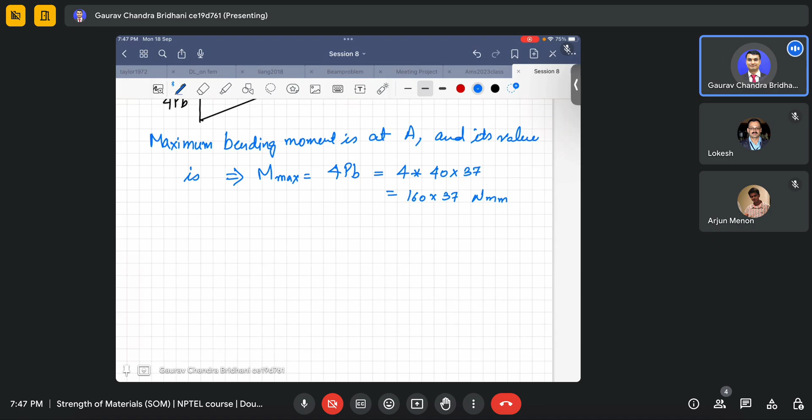Okay, so this is the value. Now it is asking what is the maximum value of the bending moment. It doesn't matter in which part, because the whole bracket is made of the same diameter, so I am not worrying about that. The only problem was to find where the maximum bending moment is occurring, and I found this. Now what I need to do is visualize the diameter.

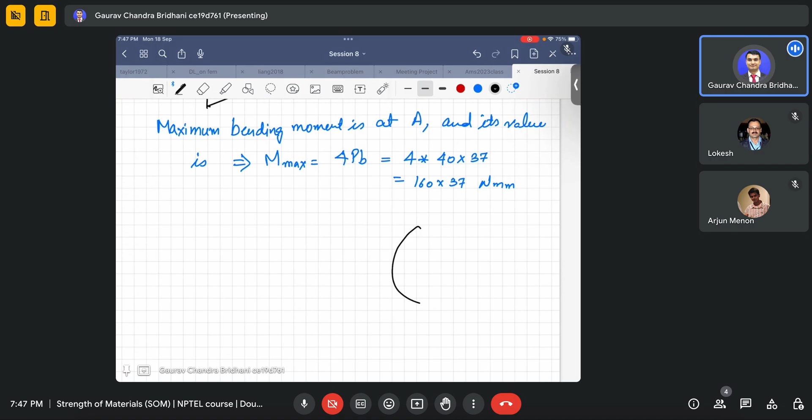So I'll draw the cross section. It is a solid - in the question itself it is given, it's a solid fiberglass rod. So this is the center. Obviously I am interested in the maximum, so here only it will be the maximum. Suppose D is the diameter, so this will be D by 2. So this point will occur at D by 2.

So what I will do, I know y max - where it will occur is D by 2. I know Iz is pi by 64 D to the power 4. I know moment m max is 160 into 37 Newton mm.

Okay, now let's apply the bending formula again. So what is our bending formula? I know one more thing, that is sigma allowable. So sigma allowable fiberglass, Fg, I'm writing. Sigma allowable is given as 30 MPa.

So what is our bending formula? It is m max by Iz equals to minus of - I'll drop the minus sign right now because I'm not interested in whether it's compression or tension, I am interested in the maximum value - so sigma x by y. So m max is 160 into 37 Newton mm divided by Iz, which is pi by 64 D to the power 4, is equals to 30 MPa divided by D by 2.

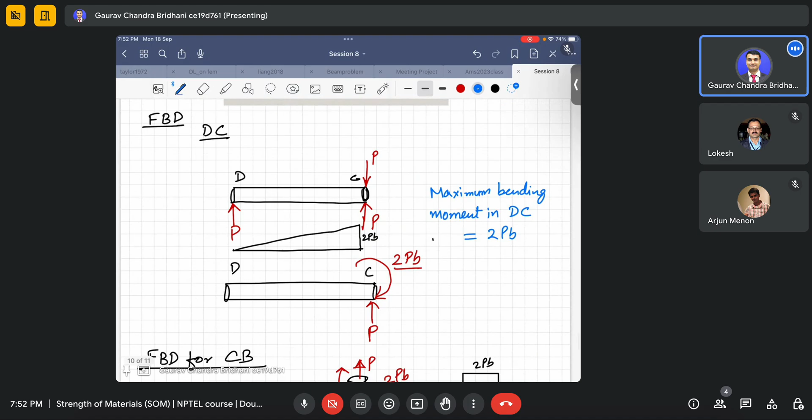So where it occurs - in this case it will occur at A. How we come up with that, we just need to draw the free body diagram, and we keep on drawing the bending moment diagram. So when we draw the free body diagram, we can also draw the bending moment diagram, and from that we can understand how it will be varying where.

One thing - I think this won't be like this. I think I drew it in a wrong sense, because there you can see there are two different signs - the bending moment having two different signs. I just ignored this part, I think, so you can see I considered them the same. So you are having two different signs, and you have to make sure that you are doing it correctly.

So this is causing a moment like this, and this is similarly causing a moment like this, and you have to consider that there is no force here. If there had been a force like this, then the situation would have been different, like we have in part AB, because then you have a variation like this - that force will cause a variation. But that is not the case here.

So I will draw it with the sign convention. If we assume this as the axis of the beam, and consider the positive and negatives, you can see that this will actually be sagging, because this moment and this moment will cause compression in the top surface and tension in this part. So basically I can draw this as positive. I drew it correctly, but I wanted to show it with the proper sign. So this will be positive and the other one will be positive, like this.

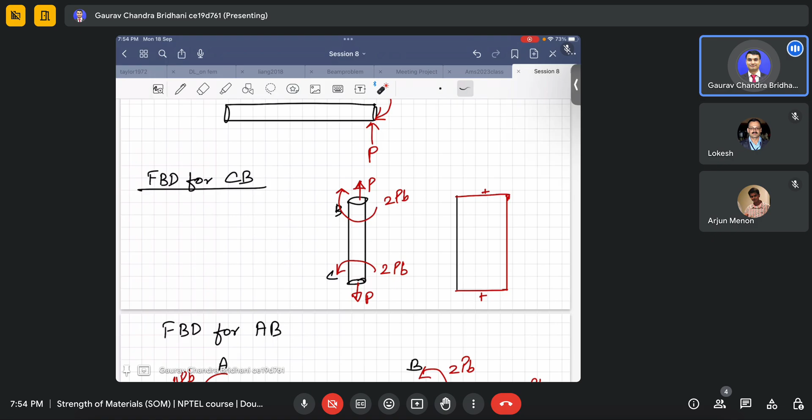Because there is no P acting there, this load in this way will not cause any variation as we have in AB. Otherwise there would have been a variation, and also because this uniaxial load will not cause bending moment - this P will not cause bending moment. Only lateral load causes bending moment. Here this is a lateral load, so it causes bending moment. Here this is the lateral load, it causes bending moment. Axial load won't cause bending moment.

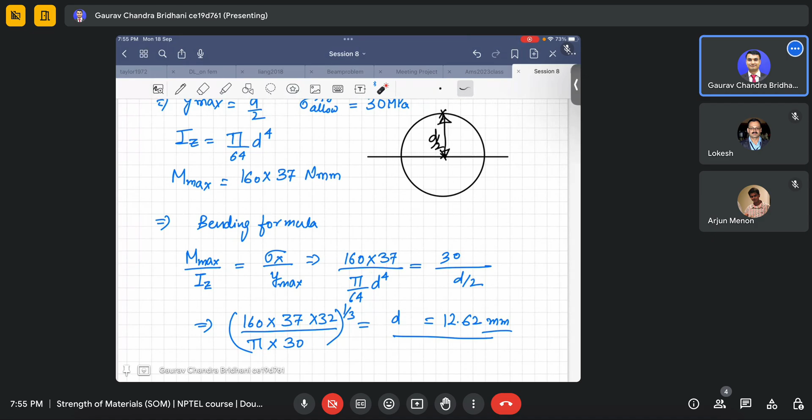Okay, so I think you guys understood this part, this problem. Here the main, yeah.

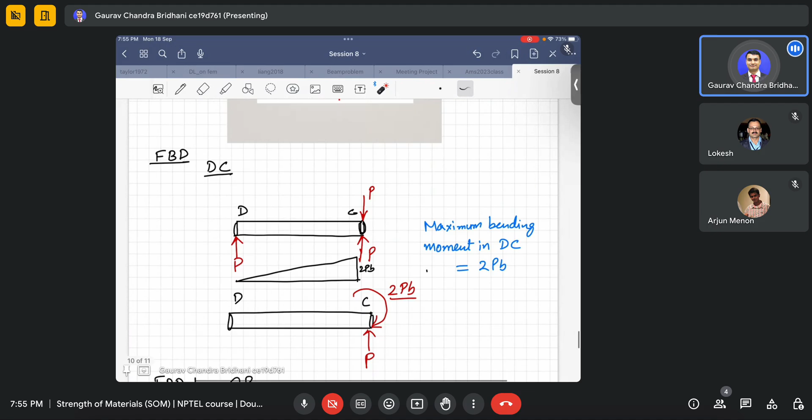So here's what I found, the catch is important in drawing the bending moment diagram, or finding where the maximum bending will occur. For that we should have the knowledge of drawing the free body diagram. Once we know how to draw it, then it's going to be fine. So that is the catch.

There will be more such problems with different scenarios where beams are used. This bracket is one example. It can be used for any kind of load, and we generally see these brackets in our homes. They take some load, and are generally made of polycarbonate or polyethylene material. They are designed in a fashion specific to the load, for how much bending they can resist.

Sometimes the load will be given, and you will be asked for a particular load how much diameter we need. So we have been given a load, and we design for how much the diameter can be, with minimum diameter we can go. Sometimes there will be a restriction on the diameter, a specified maximum diameter that we can't go beyond.

Somewhere this will be acting as a pin, inserted into some part, and the diameter of the hole we can make in that part will be of specific size. We can't go beyond that, because when we make a hole in a plate subjected to plane stress, it causes stress raisers near the edges, there is stress concentration near the edges. There are many factors involved.